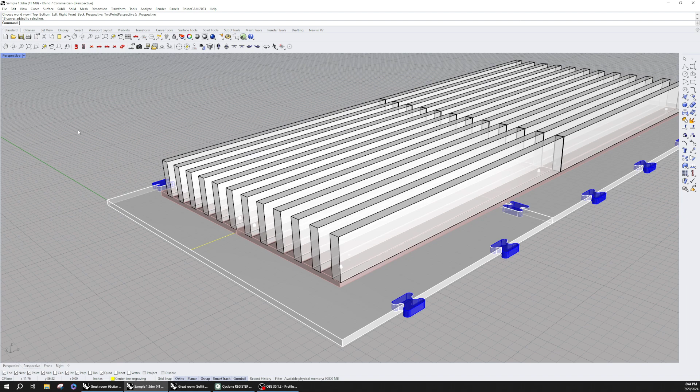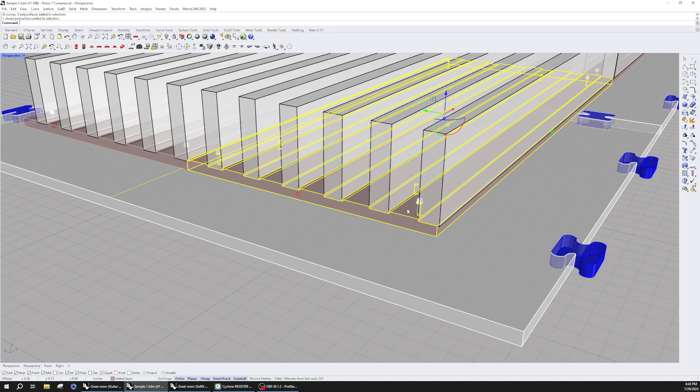This represents the sample that we are going to generate. There's a couple things you'll hear me referring to. So we have our mechanical layer, which is this layer right here. That's the first layer that goes up against the ceiling, against the framing, the ceiling joists. And then we have our decorative layer, which is this layer here, and this is the cedar veneer layer.

We've got our 1.25 by 5 inch slats. Let me turn those off, and I'm going to turn off the mechanical layer. Or actually, I'll leave it on for a second. Actually, I will turn that off. This mechanical layer, this is the way that it sits on my machine when I cut it, but when this gets installed, this is going to be the projected ceiling.

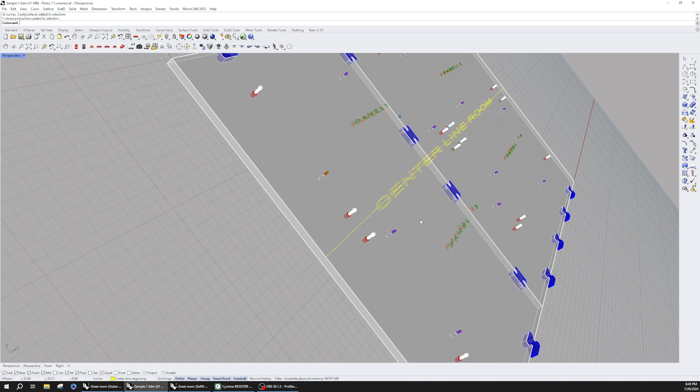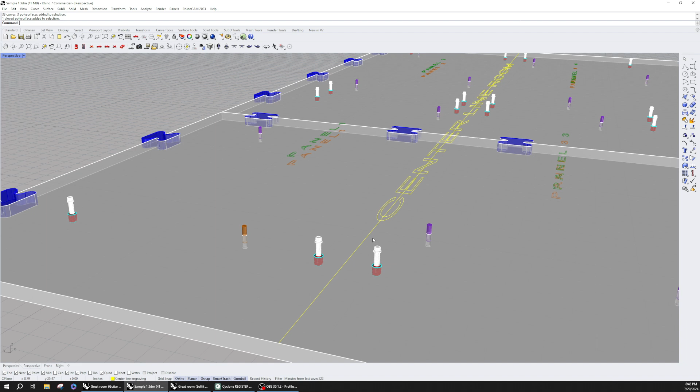So we will generate a center line. Say we're looking at the family room right now. We're going to generate a center line from the room, and we will have an engraving. Anytime you see lettering or a line like this, it's an engraved line that will be cut with a V groove cutter, probably about 0.15 to 0.2 in depth. So you'll see a nice engraving that goes through the panel, and this would be one piece of plywood. This would be another piece of plywood.

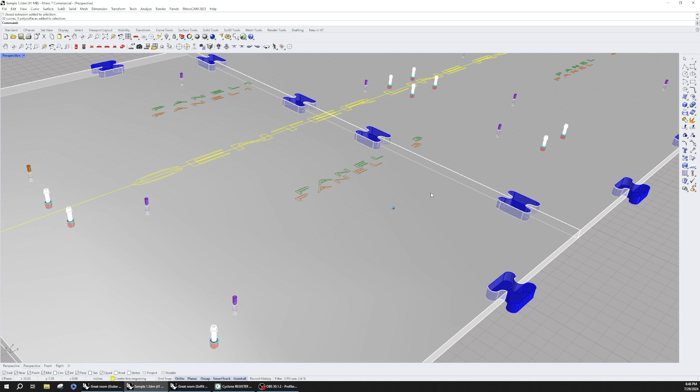You'll hear me refer to a thing called a dog bone or puzzle pieces. That's what these are. And these are what give us our alignment from one sheet to the other. I have those grouped together. So these are very precise cuts. The line where these two pieces of plywood come together is at a 0 point, and we cut these with the CNC. We're cutting these puzzle pieces so that they lock this whole ceiling together very accurately.

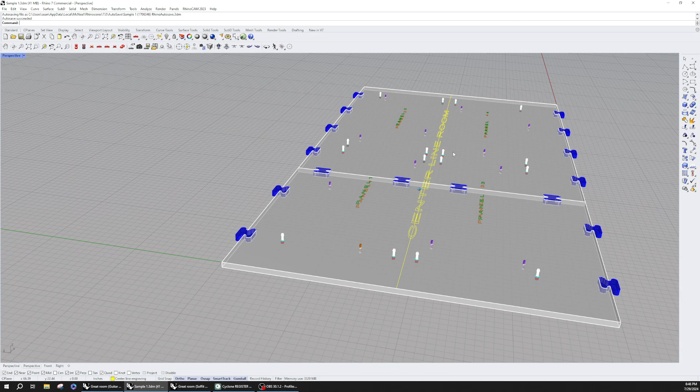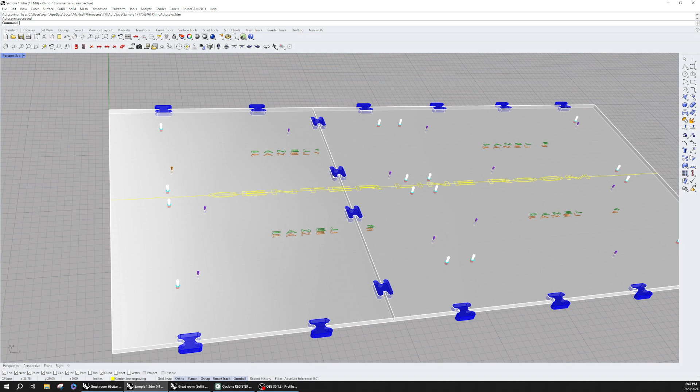So we would start by identifying our center line and the pieces of plywood that align with the center line of the room, and we would start with those pieces and then work our way to either side, and then end. I didn't put puzzle pieces on the ends here. This is our sample piece that we're going to cut. This is within a single 4x8 sheet, but this is so you can see how these things go together once I get it to you. And then I'll talk about all the other elements that you see here.

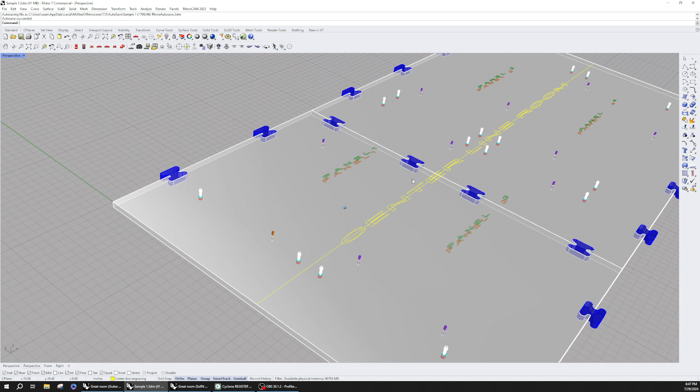So our first layer is the mechanical layer. It will be locked together with the puzzle pieces, and we have our center line. So with a laser, they can identify off of the floor what the projected ceiling is, and align those pieces. This layer here, the green layer. Let me turn that off. This lettering here is going to represent panel 1, panel 2, panel 3, and so on, and this will be engraved into this piece.

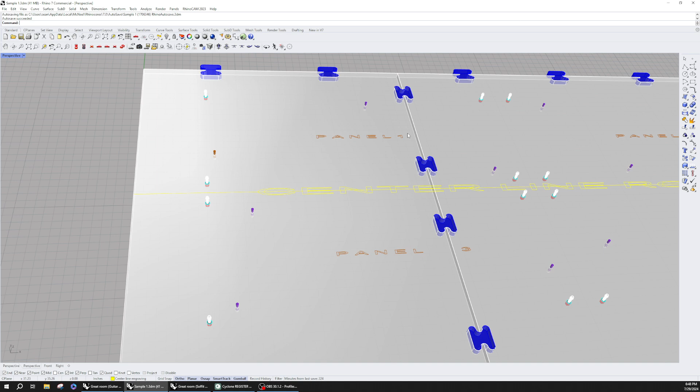So if this was the first piece that was installed off the center line, we would have engraved panel 1, panel 2, and then 3 is on this side. Then when we would cut this one, we would do the same thing. We would engrave those letters for that sheet. And what that's going to do is identify the... let's turn this back on, and let's turn on this, our decorative layer.

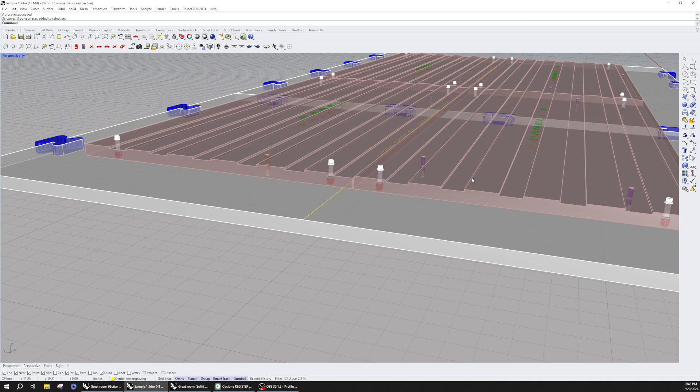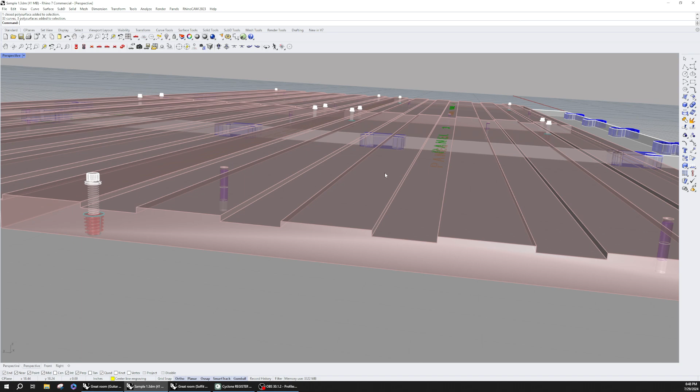And just as the mechanical layer below has the engraving down there, this upper layer will have engraving in it also. Obviously, we don't want to engrave on the open area, but we'll do engraving in this channel, this 1/8 inch deep channel where the 1.25 by 5 inch pieces are going to be, and they'll be attached from the backside into this prior to the installation. Let me turn that off.

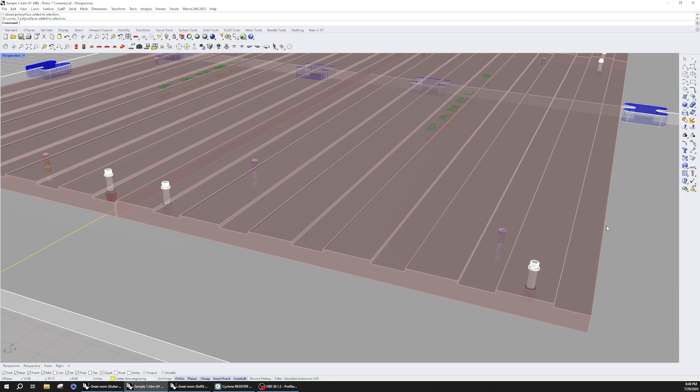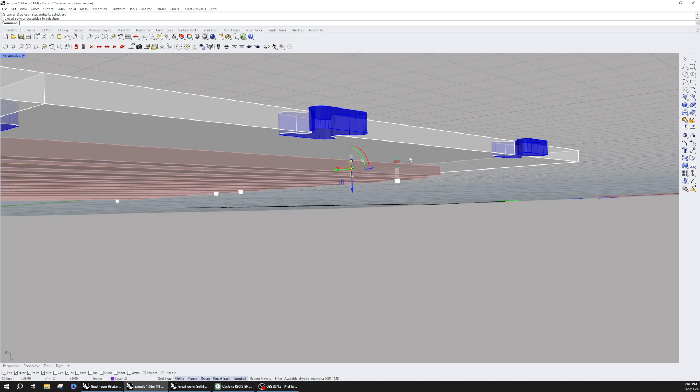So we're back into the relationship between the mechanical and the decorative layer. These purple pins are 1/4 inch steel location pins that are cut, and these are randomly placed. There's 3 of these on each individual panel. So what the installers will do is, when this is hanging from the ceiling like this, they will grab panel number 3 or panel number 2, whichever one, and they will place those 3 pins, which are random, but they actually line up in these slots.

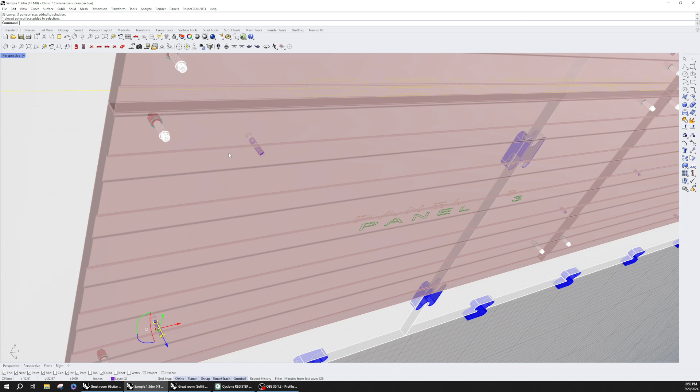They'll place those pins, and then they'll move it up until they interact with the matching pin that is in the mechanical layer.

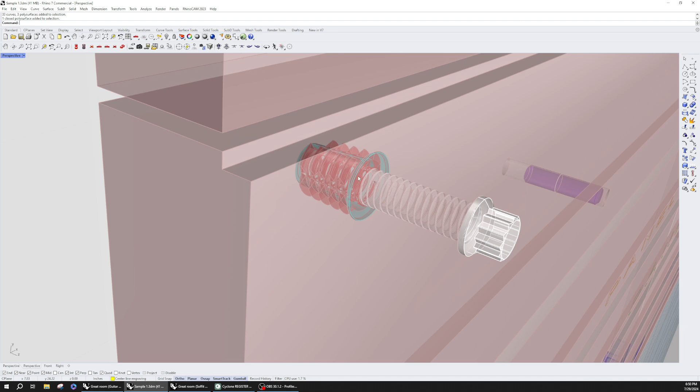And then these guys here, this is an insert that we're going to put in. It's a lag thread that goes into the mechanical layer, and then it has a machine 1/4-20 thread that accepts the bolt that is pre-drilled.

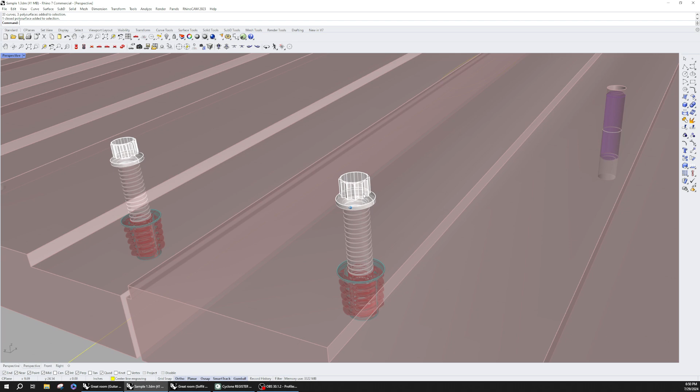This is a star head, and Kurt and I talked about it and I have it. I just don't have the CAD drawing for it. I will get that, but we're going to use an 82-degree tapered Allen thread. I'm going to see if I can get a Torx head, but either a Torx or an Allen that will fasten this decorative layer to the mechanical layer.

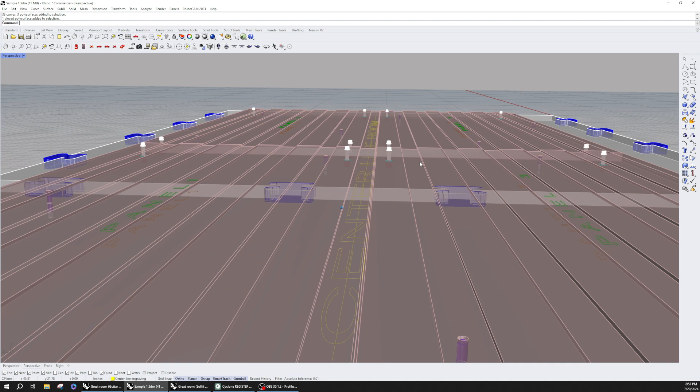These guys, you can see here what we did is we have a small gap, a 1/16 of an inch gap here, because it doesn't need to be tight, because the pins are what is going to hold alignment to all of these guys. And the reason for this gap here, it doesn't need to be there, but the distance between that corner and that corner right there is the 1.25 inches, which is the slat. So you can see the relationship there between that gap and that guy there.

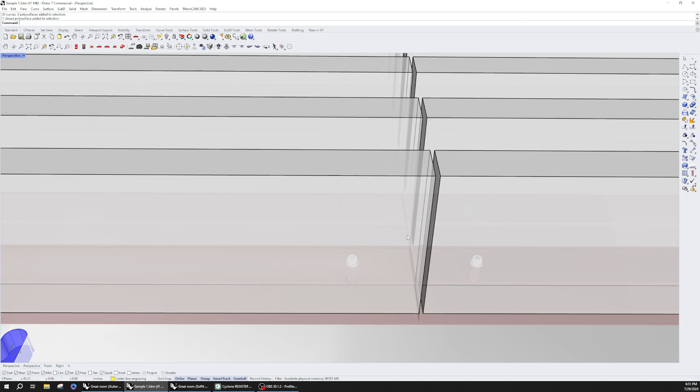The other thing that you're going to see in the sample is there were 2 different options that Kurt and I went over. Let me turn these guys back off. So these are both going to be to a 0 tolerance. So these are going to come together. These will have this 1/8 inch deep slot that's going to accept the 1.25 inch slats. And so this one comes through like that. That's the relationship of those. Let me go to shaded mode so you can see that's what it's going to look like.

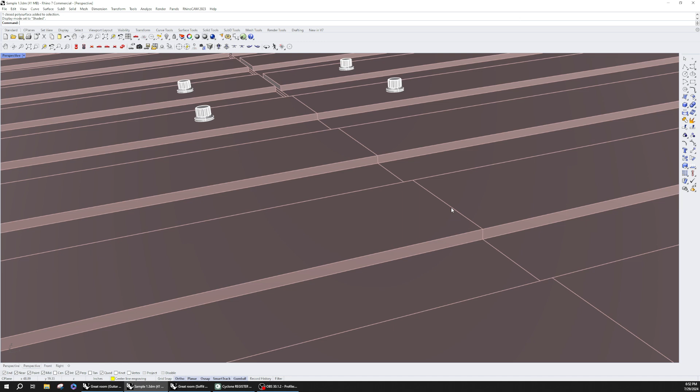And then over here, Kurt wanted to, and you'll see this when we cut this, we're going to do a small notch at the end here so there's an actual gap. The depth and width of this gap is the same as the depth of this gap, which is 1/8 inch by 1/8 inch. So let me turn these guys back on.

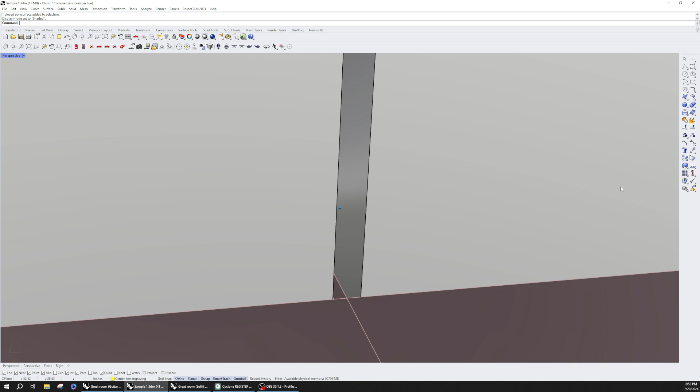So when you're looking up from the floor, there's going to be this small rabbet that will travel through the piece like that, and these guys will stop, and there's an actual 1/8 of an inch gap between these 2 pieces where these won't actually touch. There's going to be that gap.

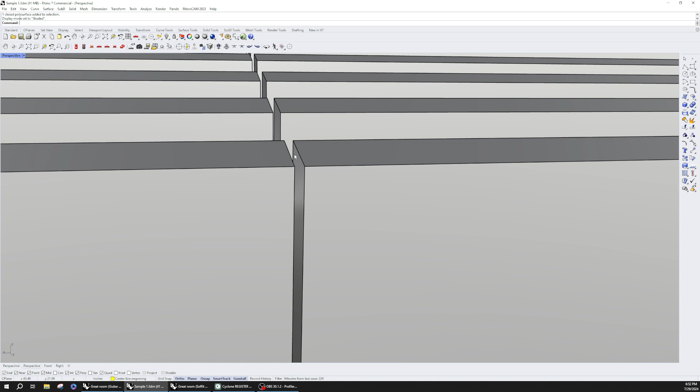And so this sample does the same thing, just this one has the continuation of this versus stepping down like that. So that'll be the difference between this row and this row when we take a look at that.

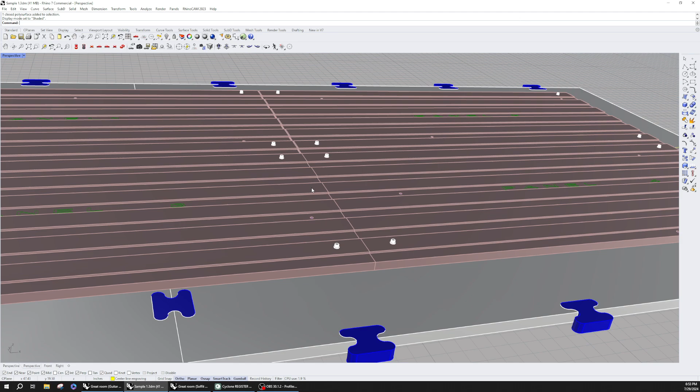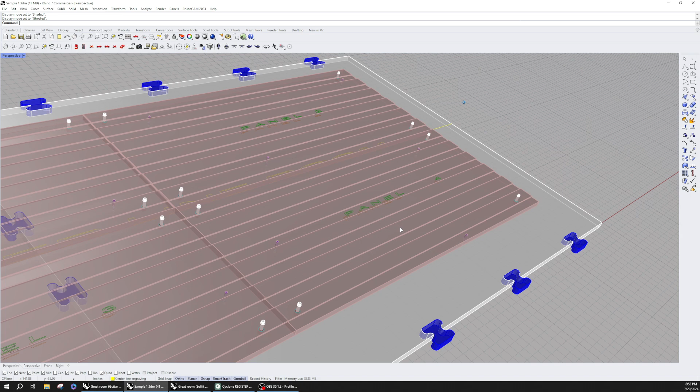So I've described the engraving for the installers for identifying which piece goes where. We've got our puzzle pieces, which are going to keep all of these in alignment as we stack pieces end to end to end, and then side to side to side. And then the engraving is what is going to identify which panel goes where.

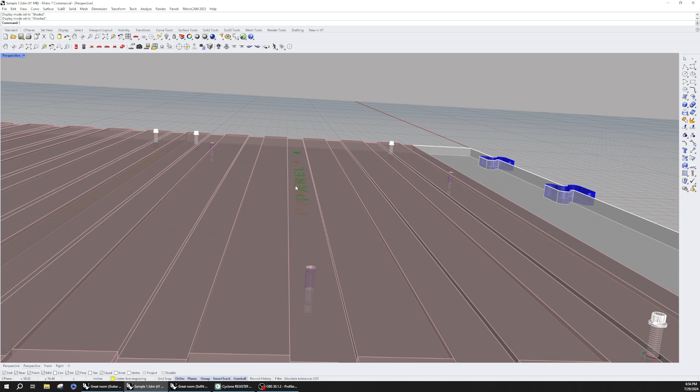And I don't know if you'll notice, but these location 1/4 inch pins are totally random, but they are inside of this groove, so they're not visible. I have to cut these on the CNC from this top side, where we can do the engraving. We can cut the slot. After we cut the slot, then we do the engraving, and then we drill this precision hole, 3 of those within this panel, that is going to identify where this decorative panel fits in this mechanical layer.

All right, let me get rid of that. Sorry, little phone call.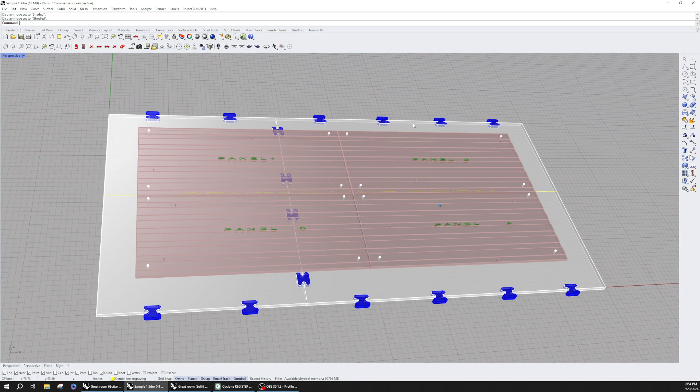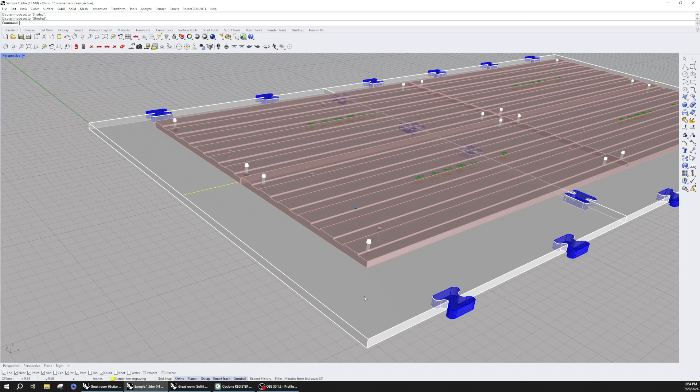So fasteners, engraving, location pins, and puzzle pieces for aligning. So this is what the sample that you're going to get is going to look like. Once again, I am going to use a tapered head screw in this application. I'm not sure if I have it. No, I do not. I didn't import that yet. So I will have that in the model that we're going to generate.

All right. So hopefully that's helpful. We'll get this guy cut and get this up to you so everybody can put eyeballs on an actual physical piece.